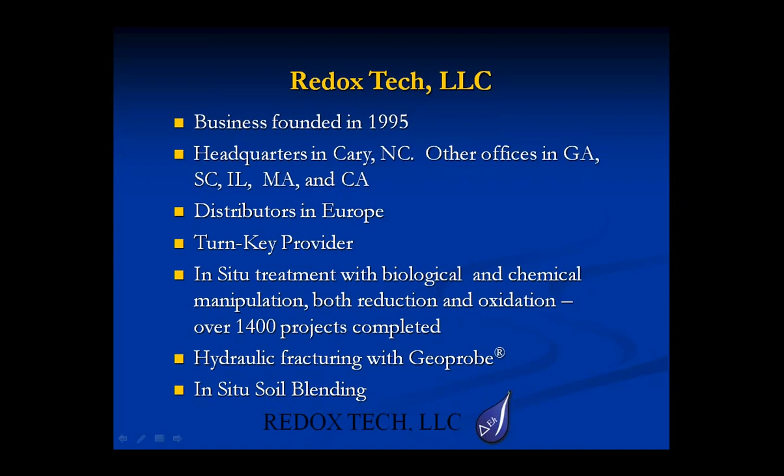In the spring of 2013, we entered a co-marketing, co-distribution agreement with Carus, and this has become a very mutually beneficial agreement. A lot of the products that we manufacture can now be purchased directly through Carus.

The way I have this talk broken out, I thought we'd start off just talking about the concepts of soil blending, go into the different types of equipment that are available out on the marketplace, and then specifically talk about RemOx ISCO Reagent, which is Carus's potassium permanganate, and how it relates to soil blending. And then I've got 3 separate case studies that I'm going to show that kind of illustrate the type of projects we get involved with and what kind of results you can expect to see.

The soil blending is pretty simple.

Basically, we're just mechanically mixing the soil so that we homogenize it and uniformly distribute whatever amendment it is that we're trying to deliver to the subsurface.

Our production rates when we've done these projects are comparable to dig, haul, and backfill. One of the big advantages to soil blending is that there's no long-term liability associated with waste disposal. Since we're treating everything in place, you don't have to worry about that waste stream like you do with dig and haul. Our costs can be anywhere from 2 to 10 times less expensive than dig and haul, and that's based on how big the project is, what types of soils we're dealing with, how deep we have to go, and how much amendment we're applying.

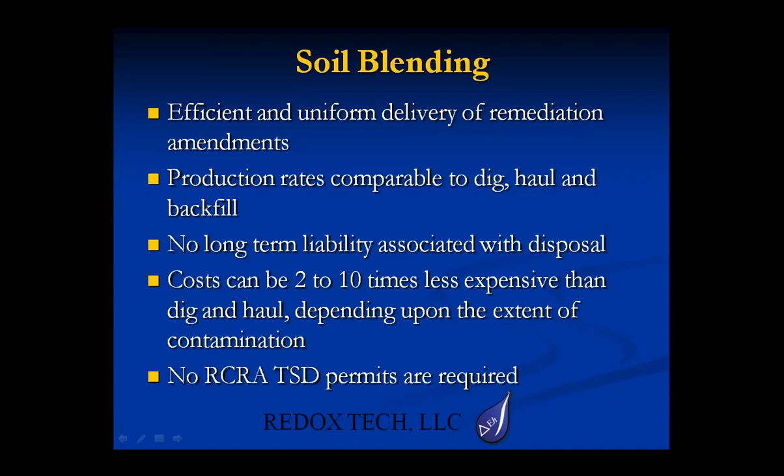One of the misconceptions with soil blending is that you need special permitting, and that's not the case. As long as we're working within the area of concern, we're not going to need any special RCRA TSD permits.

And then the question becomes, when would you consider using soil blending? With our excavator style blending heads, basically anywhere you can dig and haul, you're going to be able to soil blend. But in particular, you're going to be looking at soils that are really cohesive, low permeable soils that aren't going to let you distribute an amendment using other techniques like injection.

You also might want to consider soil blending in areas where you have high volumes of amendment. Let's say you're doing a soil stabilization project and you want to add 5 weight percent Portland cement. Soil blending is going to be a lot more efficient of an approach than trying to inject those kinds of volumes. And then finally, your time frame might be a key component to deciding whether you want to do soil blending. If you've got a site closure on the horizon, you want to get the cleanup done quickly, but soil dig and haul isn't an option, soil blending is probably going to be your next best bet.

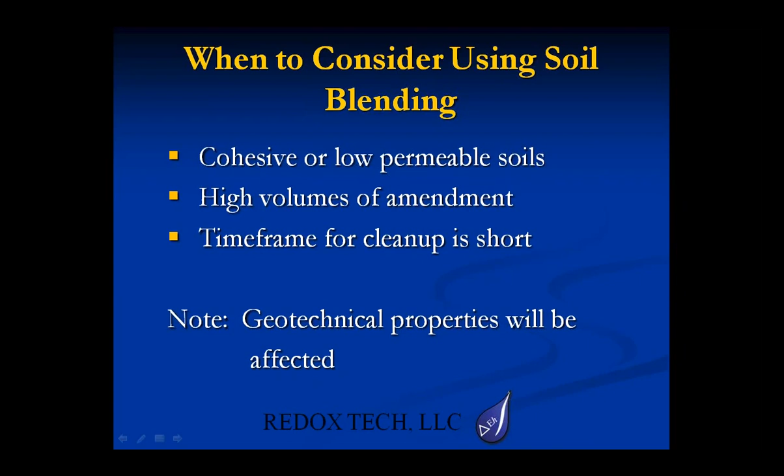One thing I do want to point out is that because we are tearing up the soil fabric, we are going to be affecting the geotechnical properties. So the compressibility, shear strength, things like that are going to be affected. Depending on what your end use is and the time frame, you might want to consider soil stabilization as part of that remedial design. And that's just going to be dependent on what your end use is going to be.

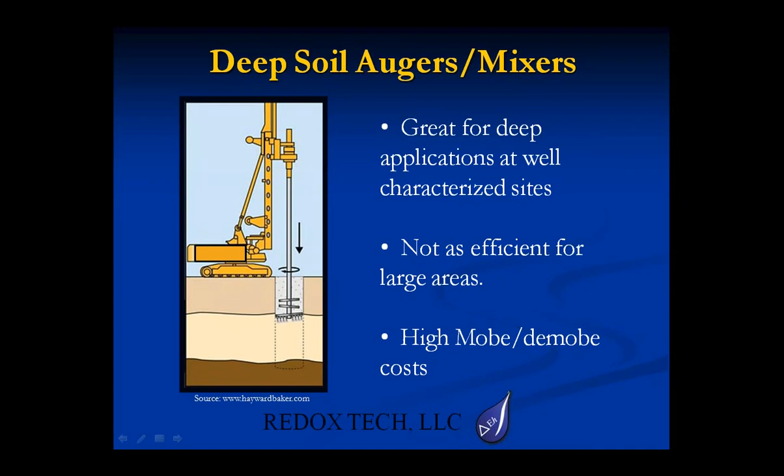So I've got soil blending broken out into 2 different classes of equipment. You've got your deep soil augers and mixers, and these are great for deep applications. These are large style equipment mounted on crane style equipment, and basically you're rotating augers down into the formation and blending in your amendment as the auger goes up and down. Obviously this type of equipment needs a lot of space to operate. It's not going to be as efficient for large areas, and because of the size, your mob and demob costs are going to be quite high.

Other style soil blender would be the excavator style blender, and these are the types of equipment we use and what I'm going to present today. These are depth limited. Typically we're working to about 25 feet maximum, but we can go deeper if we bench. We've done projects as deep as 35 feet. We even have a project later this year that we're going to go to 45 feet. And to do that, we're going to be benching down, meaning our blender is actually entering into the excavation to get to those deeper depths.

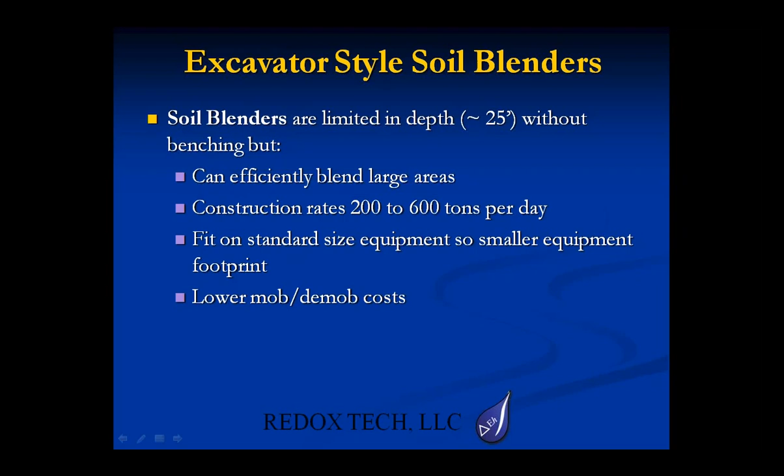This equipment is pretty efficient to blend large areas. Our construction rates vary from 200 to 600 tons per day. Again, that's going to depend on how big of a project we're dealing with, how deep we have to go, what the soil type is, and how much amendment we're adding. Because it is on an excavator, it's a smaller footprint than the large crane styles, and obviously our mob and demob costs are going to be a lot less because of that.

But these are just the different styles of blenders out there on the marketplace. There are others as well, but the big difference between all of these blenders comes down to two major factors: power, and the size of that blender head.

On the left, you've got the ALLU blender. This runs at about 90 horsepower and can reach about 16 feet below grade. It's not going to be very efficient in very cohesive and plastic clays. You're definitely not going to be able to plunge that to depths of 16 feet in those conditions, so you're going to have to manage that in smaller lifts.

The Lang tool, which a lot of you might be familiar with, is a piece of equipment we own. This is a much more robust blender, running at 200 horsepower. We've been able to get down to about 25 feet with that extension.

After using that equipment for a little while, we decided to go ahead and build our own blender that would be more suited for what we did, and that's the blender here on the right. We went with a 2-drum design.

Each one of those drums has its own hydraulic motor that runs it. They're load sensing, which gives our operator an advantage: as one of those drums starts hitting into native material, the torque increases and RPM decreases, so it starts cutting into that native material while the other drum continues to spin and mix.

The entire unit runs at about 295 horsepower, powered by an independent hydraulic power pack mounted on the back. Another advantage of this head is that we can actually swap out these teeth, put in carbide bits, and blend into weathered bedrock as well.

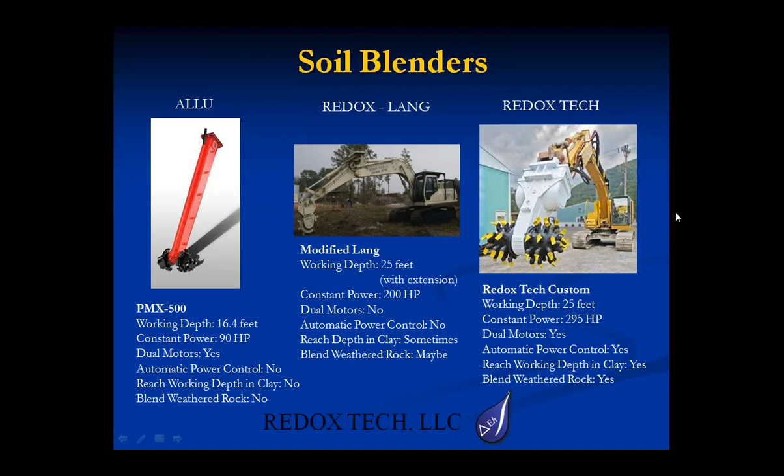Brief note about remediation costs. Typically, we're running at about $15 to $20 a ton to blend. As projects get bigger, you gain some efficiencies of scale, so the price will come down.

But the big driver on a lot of these jobs is how much amendment you're using. We've done projects where we're adding as little as $5 per ton of bulk soil. These would be projects where we're adding just maybe a little bit of quicklime for stabilization.

In other instances, you could be over $60 a ton. This would be an oxidative approach where you've got soils that have really high total oxidant demands that require a lot of oxidant.

Even so, the combined cost is still going to be pretty comparable to dig and haul, if not less. And the big advantage there is that with soil blending, you're not going to have that long-term liability within the waste stream. So even if the costs are comparable to dig and haul, a lot of times it's a more attractive option for our clients.

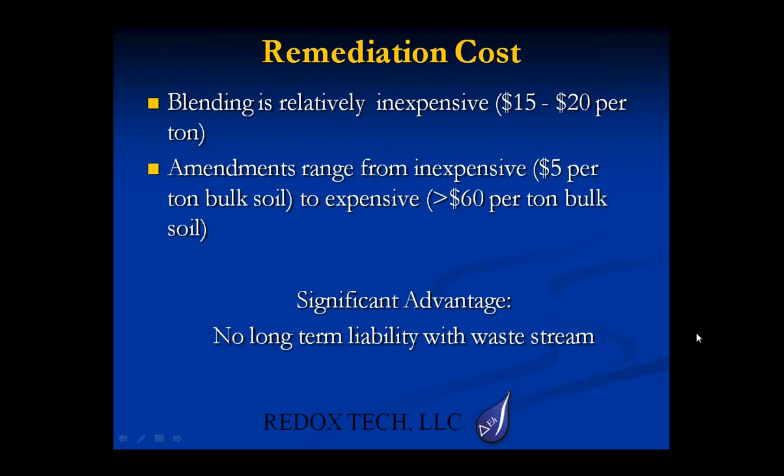It's a single component oxidant, which means you don't have to activate it or catalyze it. It arrives as a dry powder. We can blend it in place with water, and as soon as we're done blending it, the chemistry begins.

It's not influenced by pH, so if your soils are a little acidic or basic, the chemistry is still going to be effective, nor is the permanganate going to cause any corrosive effects, which is nice on the equipment. And if you have any utilities nearby, you're not going to have to worry about corrosive issues with that as well.

It's somewhat of a long-lasting oxidant, depending on how much excess you put in there. It will stick around for a while, taking care of any contaminants that might be desorbing from the matrix. Also, if part of your remedial design is to allow some of this permanganate to leach down into underlying zones, this is a good oxidant for that type of application.

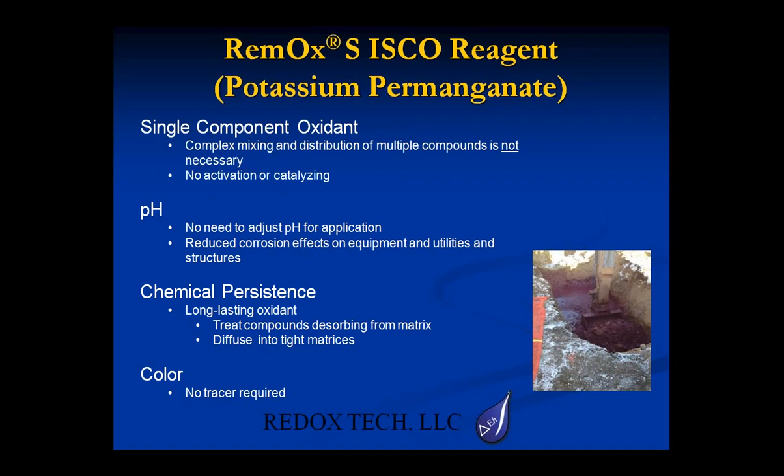And then finally, the color is a big bonus. Because it is a bright purple, you can visually see when the oxidant is completely mixed within the soil. It can also be used as a tracer—if it's leaching down and migrating, you can spot it in monitoring wells pretty easily, and I have a case study that shows that effect. Once the purple is gone, it's also an indicator that the oxidant has been consumed. So it's a really good oxidant to use in some instances.

With some of the keys to success with an in-situ chemical oxidation approach, obviously it's a contact chemistry. With soil blending, you don't have to worry about that parameter in your remedial design. We know we're getting the contact, we know we're getting the distribution, so then you need to start worrying about whether your delineation is accurate and whether you've added enough oxidant to take care of all the contaminant that's there.

One of the things we recommend to all our clients is that they do TOD, or total oxidant demand testing, on site soils. This is where you collect a soil sample, send it into the lab. The lab's going to mix it with an excess amount of oxidant, allow it to sit for about 72 hours, and then titrate off any excess oxidant that might be there. They're going to provide you with a number that's basically an indicator of how much oxidant you're going to need per kilogram of soil.

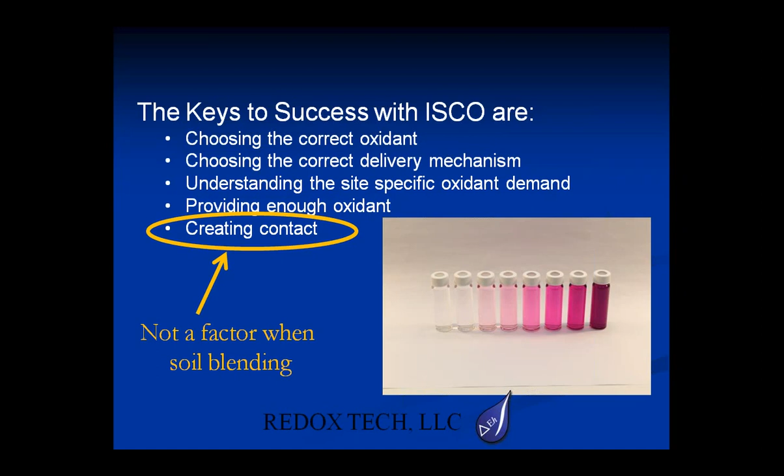This is just a guideline, not an end-all be-all number. So we typically recommend that you collect a number of these samples and have them analyzed. You'll oftentimes see variability across your site, and you certainly want to use that as a starting point in your remedial design. Carus Chemical offers this service, and there are also other labs out there that do it as well. Now I'm just going to go into my case studies.

I've got 3 different case studies. Each one's kind of unique, and hopefully you get something out of it. The first one's an industrial site in Illinois. This was a vadose application in a pretty tight clay and silt. We were treating from 4 to 8 feet below grade, so we had to dig out the top 4 feet, and we blended from 4 to 8 feet. It was a very limited area, only 500 square feet.

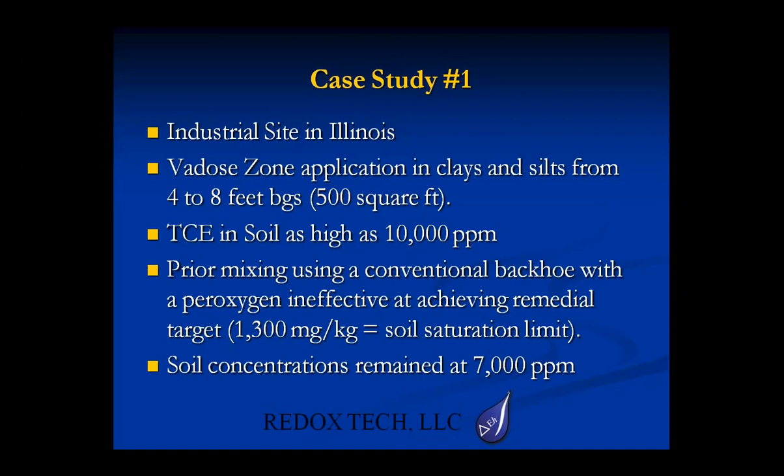One of the reasons I like to show this case study is because this was one of these instances where they had a really high cleanup objective. They only had to reach the soil saturation limit, which was 1,300 parts per million. Starting concentrations were as high as 10,000 parts per million. So the consultant decided they could just blend in some peroxygen oxidant with a conventional backhoe, hoping that that would be all they needed to do. Unfortunately, after they did that, their remaining concentrations were still as high as 7,000 parts per million.

Here's just a graph showing that data. You can see the range of concentrations after the initial mixing attempt is still pretty high, ranging from over 7,000 as low as 2,000 parts per million. Even if you didn't use an oxidant, you would expect that if it was properly homogenized, that range should be a lot tighter. Those concentrations should have averaged out a little more.

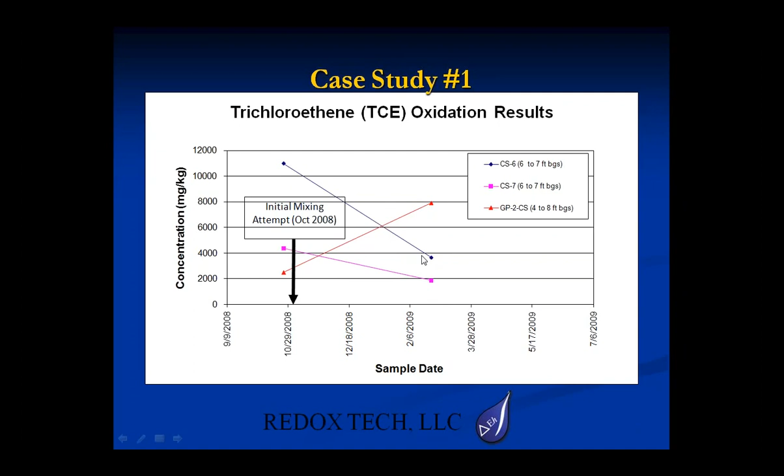So this is when we got involved. We decided to come in there with our soil blending equipment, use potassium permanganate just because we didn't want to worry about any activation chemistry. For this site, we applied just under 2,700 pounds of potassium permanganate. In this case, we just went with a stoichiometric calculation, because they had already applied an oxidant, we felt a lot of the natural oxidant demand was already gone. So we just did a stoichiometric calculation and then added a factor of safety, knowing that the cleanup standard was pretty high. We did the work in a single day for $17,500.

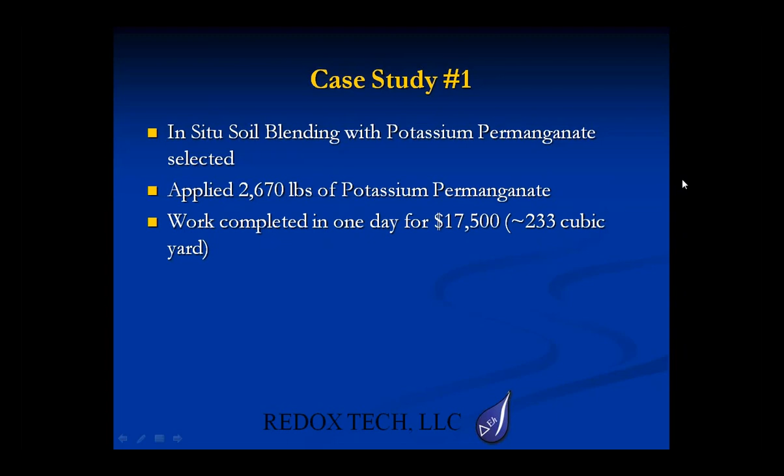That price included mob, demob, all the labor, all the chemicals, and the equipment on site. Here's the results from that blending. You can see all the concentrations came down to roughly about the same point, around 600 parts per million, which was half of the cleanup objective. So at that point, they were able to close out the site and apply for an NFR.

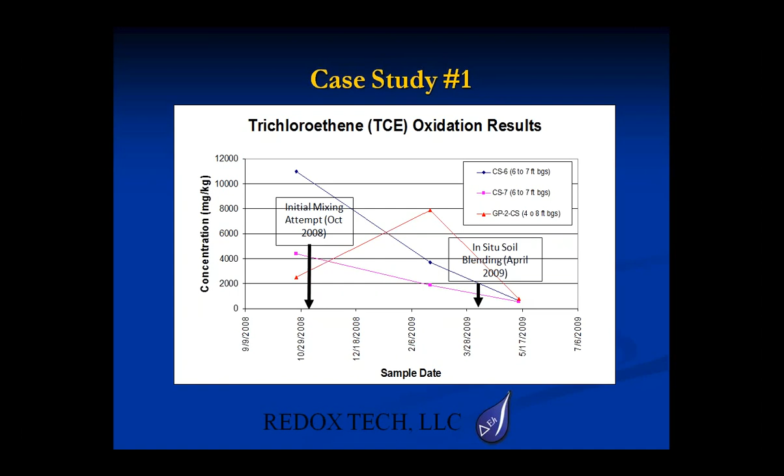The second case study, this was another industrial site in the Midwest. This is a site where they had both TCE and DCE contamination in both soil and groundwater. It was a glacial till with some interbedded sand layers. TCE in the soil was as high as 1.2 million parts per billion before any treatment was done. The consultant did do a little bit of dig and haul in the source area.

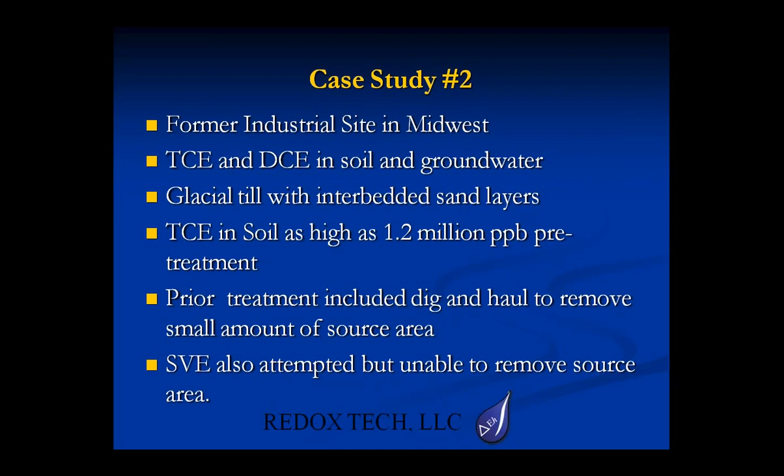They also installed an SVE system to try and remove some of that source zone contamination, but unfortunately there wasn't enough permeability. They weren't able to get much mass out of there.

So they decided to go with potassium permanganate soil blending. This was selected over soil stabilization and dig and haul because it ended up being a lot less expensive, and it provided them that permanent treatment. They didn't have to worry about the waste stream.

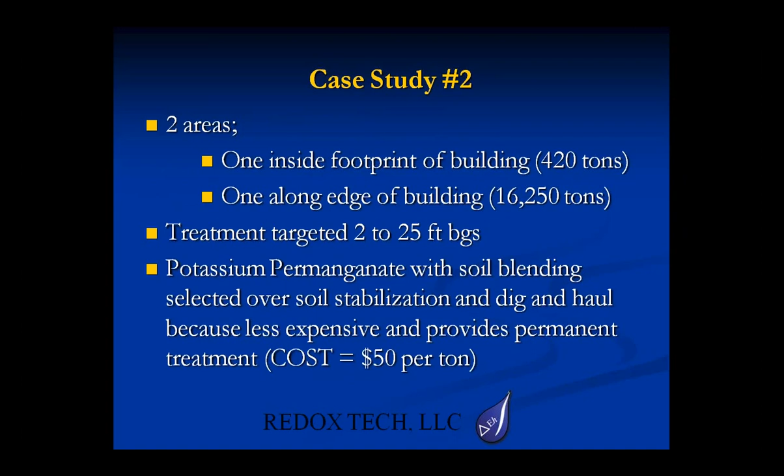So we completed this work for roughly $50 a ton. Total amount of soil that was blended was just under 17,000 tons. We were treating from 2 to 25 feet below ground surface, and to date, this is actually one of the largest soil blending projects we've completed.

For all of these, whenever we get involved in a large soil blending project, what we typically like to do is subdivide it out into these smaller, more manageable cells, and then we systematically address each one of these cells independently. And this provides a lot of advantages.

It's easier to manage your production rates. It allows us to adjust our loading based on soil contamination. So as we get towards the center of the plume here, we were able to add more permanganate.

As I had mentioned, we're treating from 2 to 25 feet below grade. For that type of a thickness, what we did was we actually excavated from that 2 to 14 foot zone, stockpiled it, blended from 14 to 25, backfilled, then blended from 2 to 14.

And that also provides a couple of advantages. For one, it's a much more efficient process. You wouldn't think so, but it's more efficient for our operators to blend a shallower lift than to try and blend from 2 to 25 feet in a single lift. It also allows us to make sure that our vertical distribution of oxidant is appropriate as well.

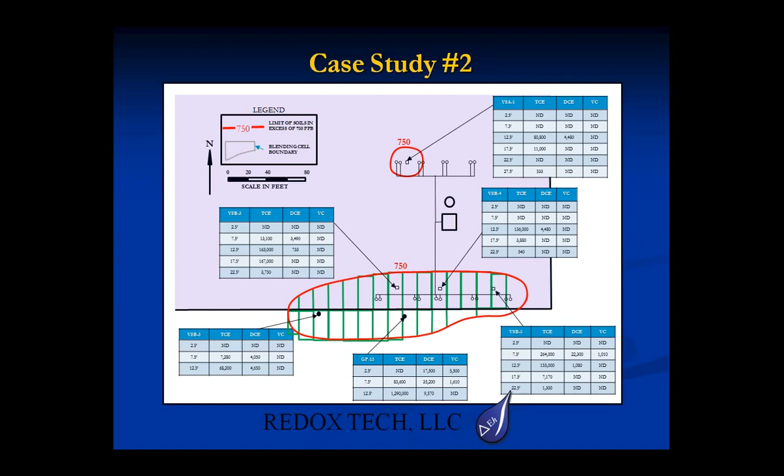So we applied just under 168,000 pounds of permanganate. This worked out to be an average dosing of about 5 grams per kilogram. This was based on TOD samples that were collected from the site.

Like I said, we did vary the dosing, so as we got towards the center of the plume where the concentrations were higher, we did increase that dosing. The entire project took just under 50 days to complete.

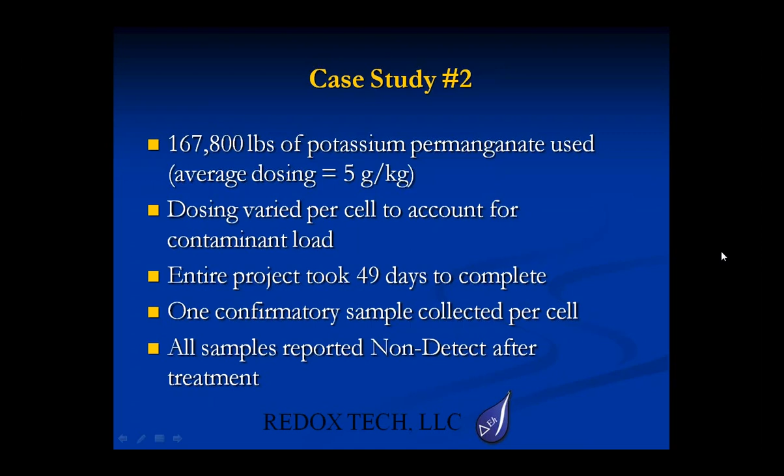After completion, the consultant took one confirmatory sample from each one of those cells. They all came back as non-detect, so very successful project for us. And here's just some photos.

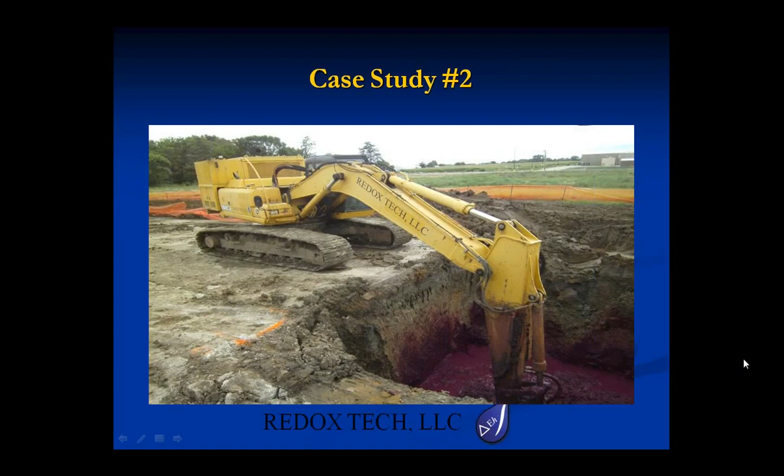This is the blender addressing that lower zone. You can see the bright purple there as the blender is mixing it in. Once that's completed, the upper soils are backfilled and additional permanganate is added and then blended to that upper cell as well.

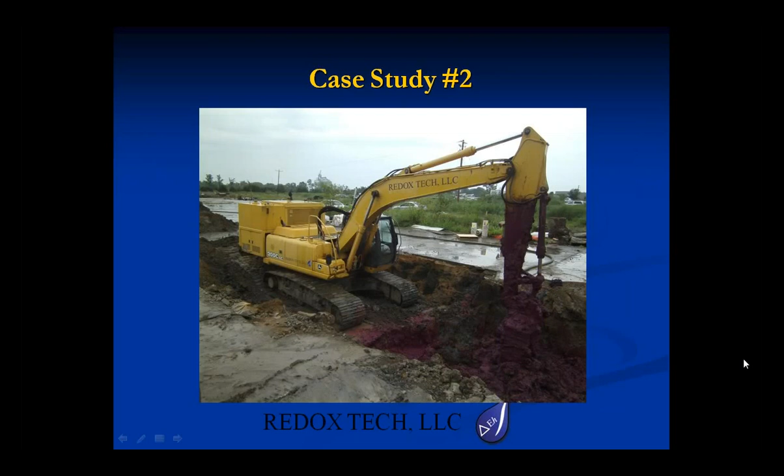So the final case study I have, this is a US EPA site in Rhode Island. This was a former drum storage area, and it was kind of a unique site. The upper 10 to 12 feet at this site was clean, so we had to excavate that and stockpile it.

And then we blended permanganate from that 10 to 12 foot zone all the way into the fractured bedrock, which was at about 18 feet below ground surface. The loading rates here were based again on TOD analysis, and all this work was completed for $70 a ton.

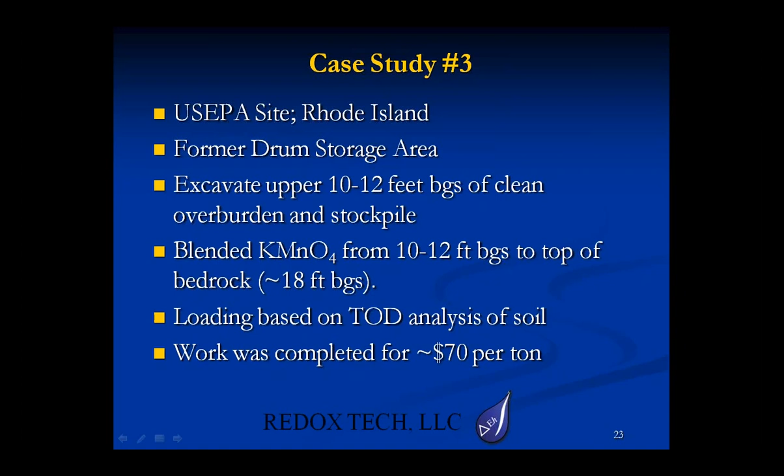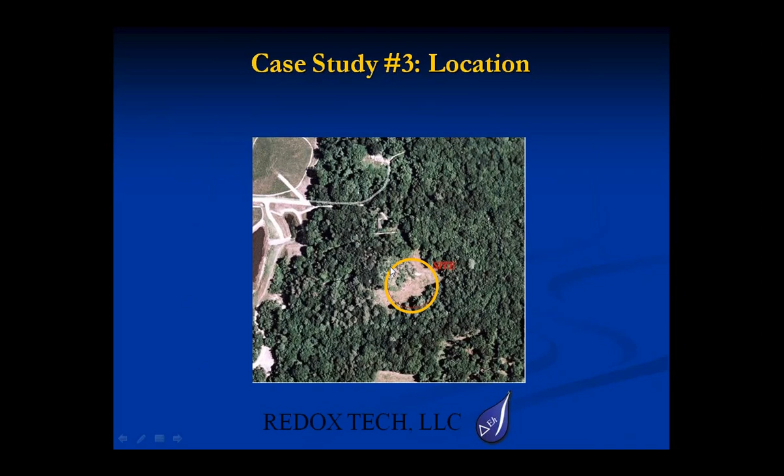So this is just an overview of the site. We did the blending in the former drum storage area, which was actually on the top of a hill in a wooded area, a unique location. Total area was about 8,500 square feet.

Again, we took that area, subdivided it out into some smaller, more manageable cells that we could systematically address one at a time.

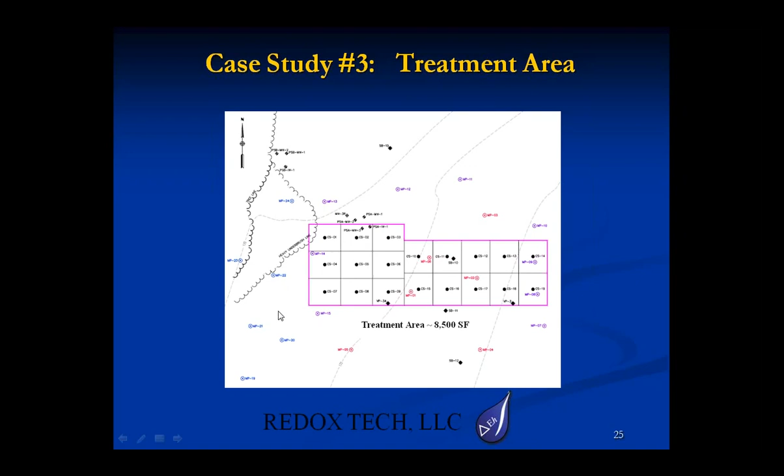Well, let me go back for a second. One of the unique features of this site, too, is that there was a large dissolved phase plume that migrated downgradient. And one of the goals here was to allow some of this permanganate to leach down into that fractured bedrock and then migrate. So there was a number of monitoring wells which were installed around the soil blending area that were monitored for permanganate as we did the work.

For most soil blending projects, we have an excavator on hand that works in tandem with our soil blender. The excavator does a lot of things—it moves soil as we need it to. One key is that we pre-mix the soil a little with the blender to make sure things like boulders aren't buried. When we come across those, we want to dig them out, otherwise it could damage the soil blender head.

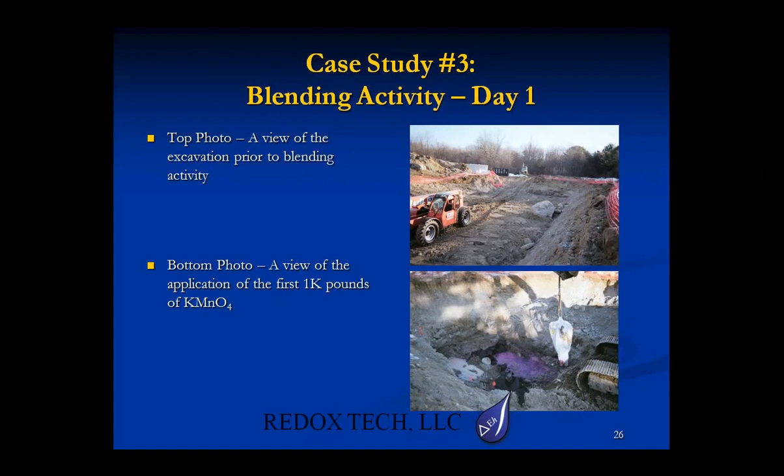Here we're applying our first super sack of permanganate into the first cell. Carus can send this to you in 1,000 or 2,000 pound super sacks. What we like to do is design our cells so that even amounts of bags are applied to each cell, which gives our field crews an easier ability to manage the amendment.

Some more photos here. This is just the excavator pre-mixing that cell to make sure nothing's buried. And at the bottom here we have the soil blender blending with the excavator on standby.

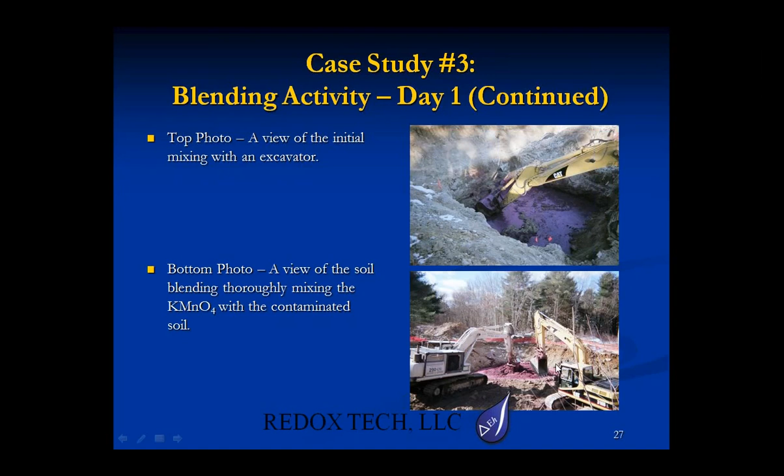After the first day, we had completed the first 3 cells. About 300 cubic yards of soil was contaminated, and 2,000 pounds of permanganate was added.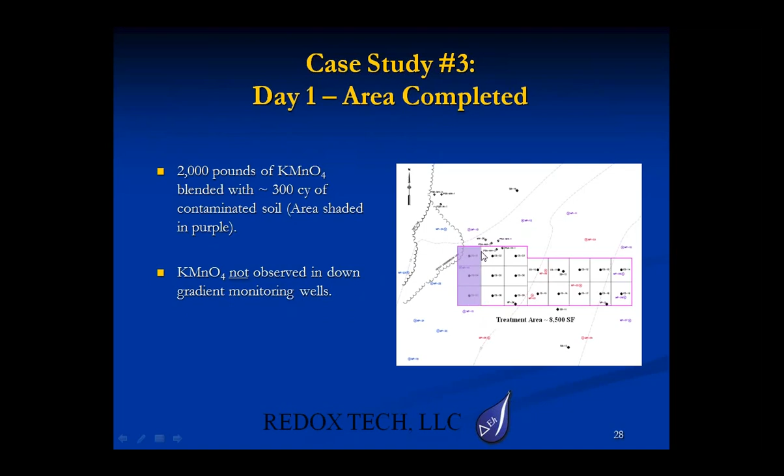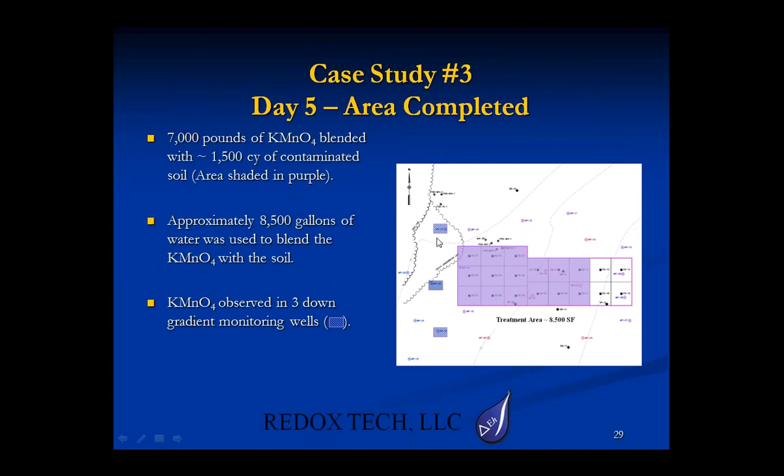After day 5, we had completed 3/4 of the cells, and at that point we started to see permanganate show up along the western edge of the area in the fractured bedrock. By day 7, all of these cells were completed.

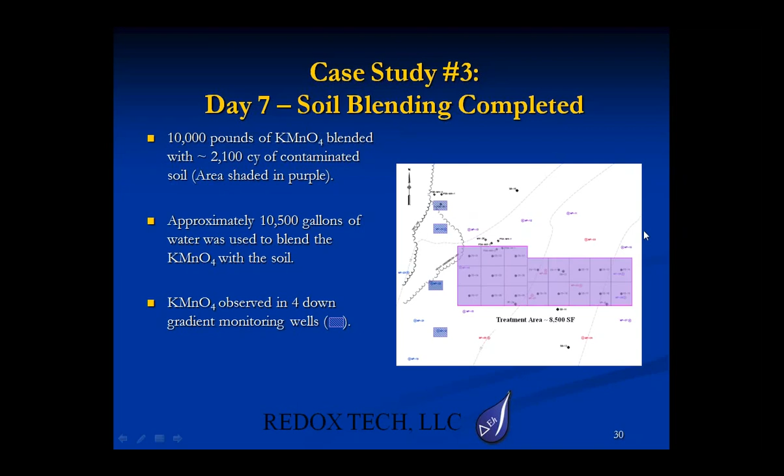An additional well started to show permanganate, and by day 12, a total of 7 monitoring wells, all located in the north and western edges of this soil blending area, showed permanganate showing up.

At this point, the client took some soil samples. All those soil samples came back clean, non-detect.

Prior to backfilling the clean soil, we placed some horizontal perforated piping in this area with some standpipes, which allowed the consultant to continually add a dilute solution of permanganate to continually feed this down-gradient soluble plume. I believe they're still doing that to this day.

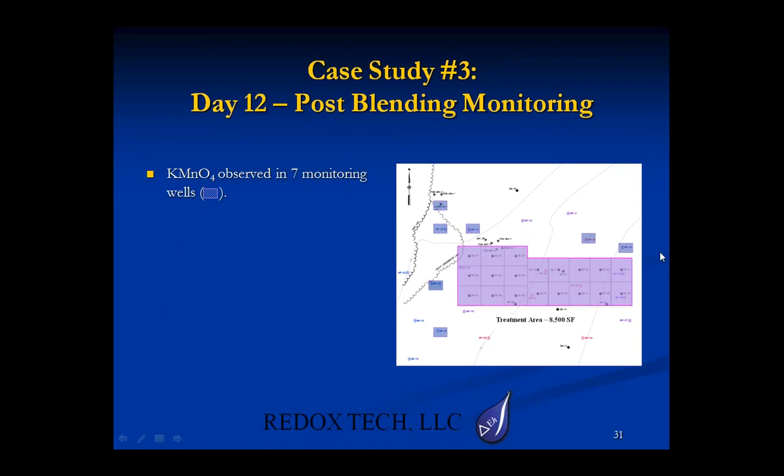So in summary, I just want to say blending with permanganate is a pretty cost-effective method for delivering oxidant into your source areas. One thing I want to point out, these case studies all reached their cleanup objectives in one application.

But there are cases, especially if you have DNAPL or free-phase products sitting there, where it may be more appropriate to plan on multiple applications, especially if you're not quite sure how much mass is there. With DNAPL, as you're blending, that gets spread out, and it's kind of hard to plan for appropriate amounts of amendments. So sometimes it's more efficient to just plan on a multiple blending approach.

And then finally, because we are tearing up the soil fabric, you are going to affect the geotechnical properties. Depending on how much time you have, you can let that reconsolidate on its own. But if you have an end use to worry about, soil stabilization may be something you should consider as part of that remedial design.